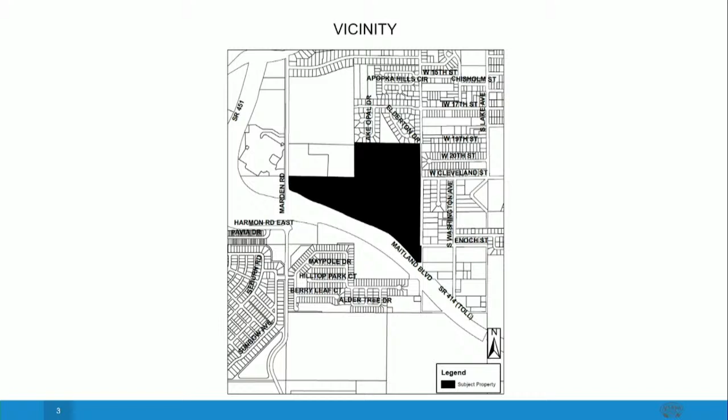The applicant is requesting a large-scale future land use amendment in order to develop Marden Road mixed-use development, a residential subdivision intended to consist of single-family residences, townhomes, and commercial. It has a zoning designation of residential multifamily, community commercial, and transitional; however, the applicant is requesting a change in zoning which will be forthcoming. Orange County Public Schools has provided a report that indicates capacity for the proposed development is not available at the elementary school level and is deficient by 4 seats. The property is zoned for Wheatley Elementary, Piedmont Lakes Middle, and Wekiva High. DRC recommends approval, staff recommends approval, and staff and the applicant are here to answer any questions you may have.

Any questions of staff? No, sir. Okay, thank you. Does the petitioner have a presentation? Seeing none, we'll close the presentations, open the public hearing. Anyone wish to appear before the commission on this item? Seeing none, we'll close the public hearing and bring it back to the commission. What's your pleasure?

Mr. Chairman, I find the proposed amendment consistent with the comprehensive plan and compatible with the character of the surrounding area, and recommend transmittal of the change in future land use from residential multifamily, commercial, and future land use in progress to mixed use, to the Florida Department of Economic Opportunity. We have a motion by Commissioner Washington, is there a second? Second, by Commissioner Stanley. We have a motion and a second. Any discussion? Hearing none, we'll vote. All in favor say aye. Aye. Any opposed say no. That carries unanimously.

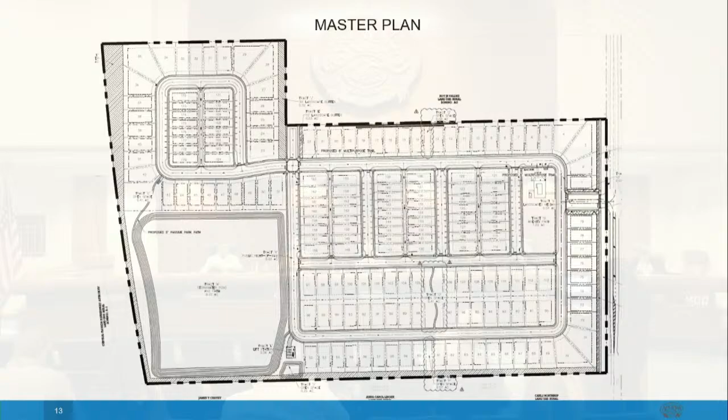There are no minimum or maximum living area standards and lot size requirements in the KPI form-based code. The applicant has submitted a major development plan detailing the construction of the proposed subdivision, which is currently under staff review. The DRC recommends approval of the rezoning, and the recommended motion is to recommend approval of the proposed change of zoning from Transitional to KPI MU, Kelly Park Interchange Mixed Use, with the assignment of the neighborhood overlay and recommend approval of the master plan.

Staff is available for questions. Okay, any questions of staff?

I have a question. How will anyone enter or exit the community? Right now, the access is on Plymouth Sorrento Road. Just one? Is that correct? Right here.

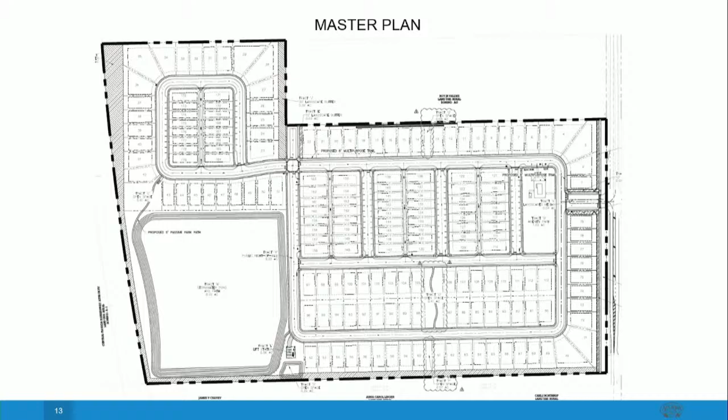And there is cross-access, as with other subdivision projects in the KPI. There's a planned cut access through here on the north. That'll actually go up to, the idea is that because of the interconnectivity designed into the Kelly Park Interchange form-based code, that'll be a spine road that'll go up to Publix. Publix right now, I think they're looking at mid-July for opening.

On the western side of the Publix lot, there's a roadway that's like the northern portion of the spine road for that side. So instead of people going out onto Plymouth Sorrento, the idea is they'll be able to go at this point and basically go north, right up to Publix, instead of going out onto a major thoroughfare.

Well, that's good to hear, because that spine road probably will have to navigate around existing businesses. There's really no business there. It's all, from here up to the north, basically farmland, residential, and larger plots. We've already got a couple of different developments looking to go in that area.

Well Jim, I have to tell you, I live there. I know there's a business there, it's a huge nursery. Nursery, agriculture, yes. Yeah, yeah, yeah.

So the spine road, is it going to go behind that? No, more than likely they'll probably sell out. They've got a few different locations, and they know they can sell that for quite a bit of money. I'm sure of that.

Okay, thank you. Further questions of staff? Yeah, Gene, is it normal to have one entrance for 900 single-family residents? That seems like a lot of homes for one entrance.

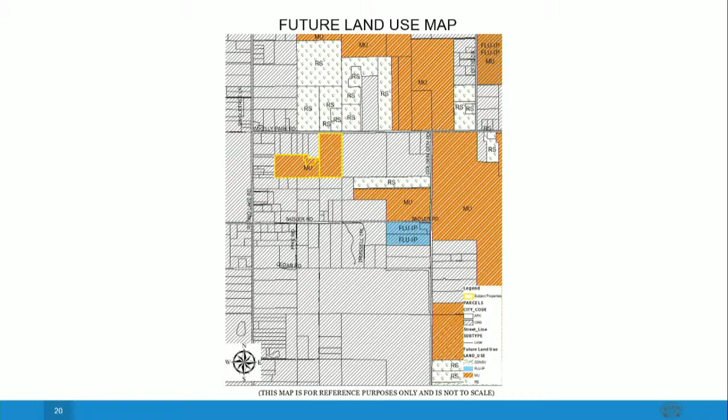The master plan shows 113 single-family lots with a minimum lot width of 55 feet, and the proposed minimum living area is 1,600 square feet. Access to the site is proposed off of West Kelly Park Road, with 4 vehicular and pedestrian future access points proposed, and in addition, 3 future pedestrian connection points are also proposed. The applicant has provided 9.48 acres of open space, where 7.73 acres are required. This open space includes a park, walking trails, and a playground.

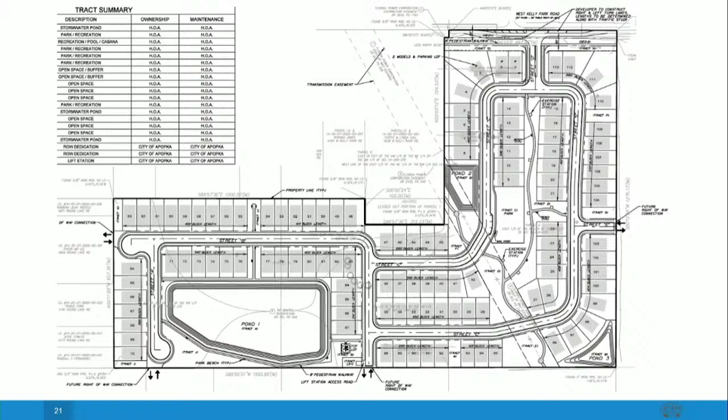The Development Review Committee recommends approval of the proposed rezoning and master plan, and the recommended motion for this evening is to find the proposed change of zoning and master plan consistent with the comprehensive plan and land development code and compatible with the character of the surrounding areas, recommending approval of the change of zoning from Agriculture District to KPI MU, Kelly Park Interchange Mixed Use District, and to assign the Neighborhood Overlay District, and to approve the master plan based on the findings and facts presented in the staff report and exhibits. This concludes my presentation, and the applicant and I would be happy to address any questions you may have.

Okay, any questions of staff? I gather the applicant doesn't have a presentation but is available for questions. Any questions of the applicant? Nope. Okay, then we'll close the presentations and open the public hearing. Anyone wish to appear before the commission on this item? Seeing none, we'll close the public hearing, bring it back to the commission.

What's your pleasure? I move that we find the proposed change of zoning and master plan consistent with the comprehensive plan and land development code and compatible with the character of the surrounding areas, recommending approval of the proposed change of zoning from AG Agriculture District to KPIMU Kelly Park Interchange Mixed Use District, and to assign the Neighborhood Overlay District, and to approve the master plan based on the findings and facts presented in the staff report and exhibits.

We have a motion by Commissioner Lorindo. Is there a second? I'll second. Second by Commissioner Norwood. We have a motion and a second. Is there any discussion? No, sir. Hearing none, we'll vote. All in favor say aye. Aye. Any opposed say no. That carries unanimously.

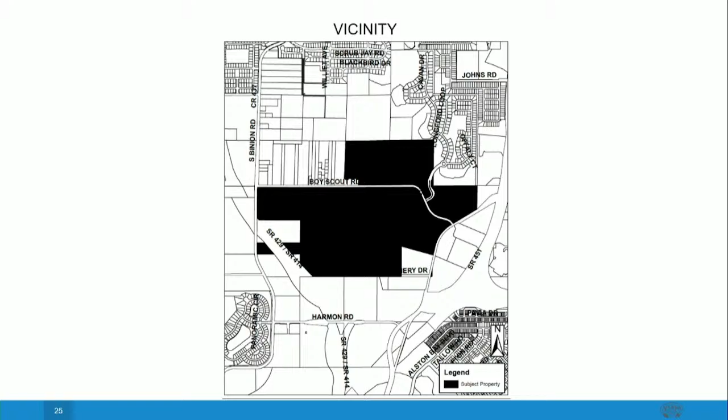The Ridge is a consolidation of 14 parcels totaling approximately 366 acres located north and south of Boy Scout Road, west of State Road 451, north of State Road 414, and west of State Road 429. The properties have current zoning designations of RSF 1A, CC, and mixed-use East Shore Gateway, and have a future land use designation of mixed use.

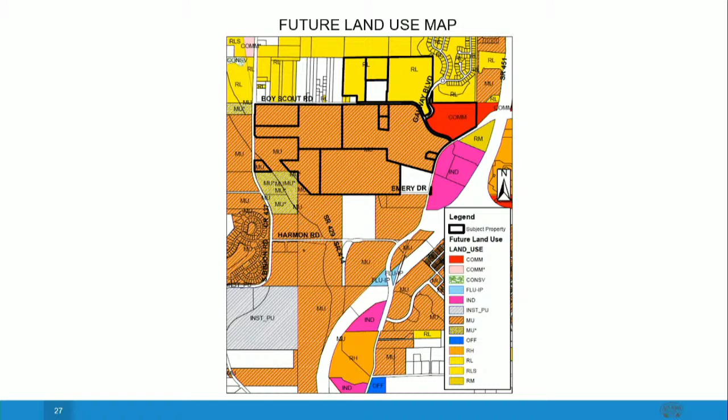The Ridge PD Master Plan proposes commercial on parcel 1 and portions of parcel 3, which is right here, as well as parcel 6 and 7, which are right here and right here. It comprises about 46.7 acres of the total area.

Based on the PD master plan, the applicant proposes the Spine Road Street A as a parallel facility right here to Boy Scout Road and leading to Binion Road via the proposed Street B. Street A right here, Street B right here, and Binion.

Parcel 1 is reserved for commercial uses and will be accessed via Galway Boulevard and Boy Scout Road, right here and right here. Parcel 2 is intended to include 340 units of single-family detached and townhome units on 79.2 acres. This is parcel 2 right here.

Parcel 3 is intended for 300 multifamily units on 16.2 acres, office uses on 10 acres, and commercial uses on 6.3 acres, which is right here.

Single-family residential detached units and townhomes are anticipated to be on parcel 4, which comprises 58.3 acres of the development, shown to have access points along Street A and B. This is parcel 4, Street A and B.

DRC recommends approval of the proposed rezoning and the accompanying master plan. The recommended motion is to recommend approval of the rezoning of the Ridge to PD and the PD master plan based on the findings and facts in the staff report and exhibits. Staff and applicant are available for questions.

In the meantime, the applicant also has a presentation. Okay, any questions of staff?

Well, maybe the applicant might cover it as well. This is a huge project, it's great. Yes. I go through there all the time to the golf course.

But anyway, you've got Breckenridge in there. Yes, sir. And not a few months ago, we approved another project from another developer on Boy Scout Road as well. I asked a question about who's to take responsibility to develop Boy Scout Road, to handle the traffic, and I didn't get an answer. So now, with all this going on, the question is still: who's going to take responsibility to build out Boy Scout Road? And also, with all this additional traffic, will there be any traffic control devices installed on Boy Scout Road? That's it.

Very good questions, and you deserve an answer. Boy Scout Road is not going to be widened because they're putting in a parallel facility. They are going to put in a signal at Boy Scout and Apopka Road.

And on the Binion side, even though it showed the roadway network a certain way, we're talking with the Central Florida Expressway about ramps to and from the north that would exit the toll road and tee into this project. So that would be a good thing.

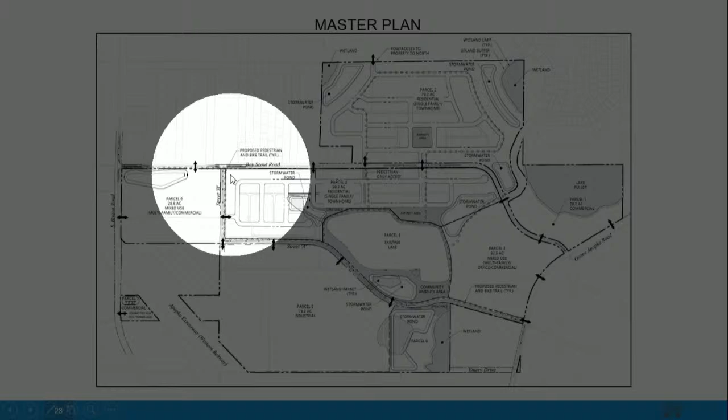So their roadway network, instead of the road doing this, it would come somewhere over here, and then this would come down. It's all conceptual right now, but we are working with Expressway, and we're thinking very hard about traffic in the area.

For Apopka Road, I'm working on an agreement right now with Orange County to widen the road. We're bringing a lot of impact fee money to the table, a lot of it generated by this project and the other ones that you all know about. All that money is going to go to Apopka Road.

The other thing this applicant is doing for us, it's sitting on my desk right now, we need to get started. They're going to study the Apopka corridor from Bradshaw Road down to Harmon Road, a pre-design kind of study so we know where we can widen, where we need turn lanes, where we need ponds. So transportation in this area has turned into a public-private partnership between the city, the county, this developer, others, and now Central Florida Expressway.

So I'm actually kind of excited, we're going to get something done. Those are both Orange County roads. They say they don't have any money, so we're bringing money to the table through impact fees, and hopefully they will fix all the stormwater issues, and then we'll take care of the road.

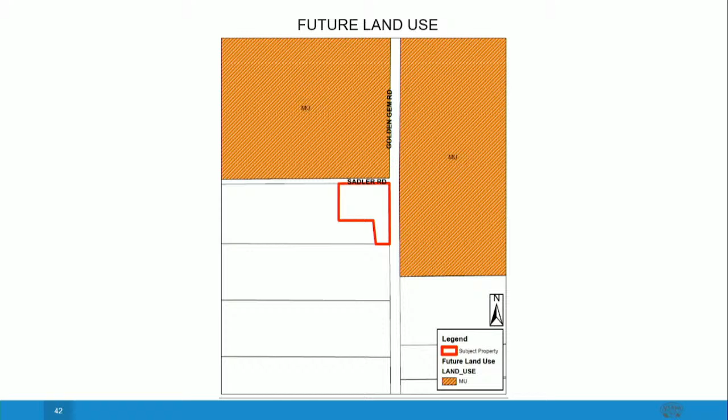It is also required to have a designation of mixed-use future land use before it is developed. DRC recommends approval. The recommended motion today is to recommend approval to amend the future land use map from county rural to mixed use. Staff and applicant are available for questions.

Okay, any questions of staff? I have a question. I've seen this before in documentation from staff, and I'm just curious about it. Policy 18.2: this future land use amendment does not include the corresponding proposed zoning category because the city has yet to adopt the development standards or form-based code consistent with this policy. I've seen that multiple times. Why haven't we developed zoning for this kind of future land use?

I couldn't hear quite a bit of what you were saying, but it has to do with karst features? No, Jim, it's policy 18.2, the second paragraph, first sentence. Is that in the report? It's in the package. Hold on a second.

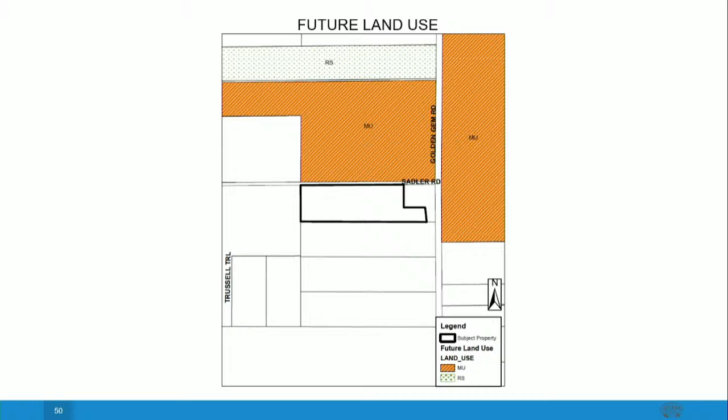DRC recommends approval, and the recommended motion tonight is to recommend approval to amend the future land use map from county rural to mixed use. Staff and applicant are again available for questions.

Any questions of staff? Any questions of the applicant? Okay, thank you. Then we'll close the presentations and open the public hearing. Anyone wish to appear before the commission on this item? Seeing none, we'll close the public hearing, bring it back to the commission.

What's your pleasure? Mr. Chairman, I would like to make a motion to find the future land use designation consistent with the comprehensive plan and the surrounding area and recommend approval for the future land use map designation from county rural to mixed use. We have a motion by Commissioner Norwood.

Is there a second? Second by Commissioner Lorendo. We have a motion and a second. Is there any discussion? Then we'll vote. All in favor say aye. Any opposed say no. And that carries unanimously.

Our next item is a change of zoning and approval of PD master plan for Marden Road, from residential multifamily RMF, community commercial CC, and transitional T, to Planned Development PD. Owner is Emerson Point Phase 2 LLC, care of Mary L. Dimitri. The applicant is MI Homes of Florida, care of Ricardo Diaz, and Appian Engineering, care of Luke M. Casson, P.E. Location is 1801 Marden Road, 1890 and 1900 South Hawthorne Avenue. We have a staff presentation.

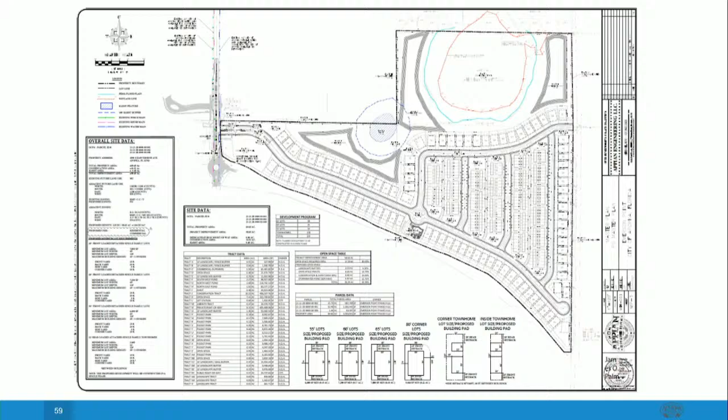A 6-foot tall wall will be provided between the commercial outparcel and lot 225 to act as a buffer between residential and commercial use. DRC recommends approval, staff recommends approval, and staff and the applicant are here to answer any questions you may have.

Any questions of staff? Any questions of the applicant?

Yes, if the applicant could come up and give us your name and address for the record, we have a question for you. Good evening, James Palm, Appian Engineering, 2221 Lee Road. Here to answer any questions.

This application will go before the city council for final approval, so whatever I say is just a comment. It says access to the site is proposed via full access located on Marden Road and Hawthorne Avenue. I'm familiar with those roads. Hawthorne Avenue is reminiscent of an issue the city had with a project built next to Rock Springs Ridge Road, where the developer wanted to connect to Rock Springs Ridge Road, and it didn't go well, so an alternate plan was developed. I'm just thinking about that project and Hawthorne Avenue, which is hardly developed. You know what I'm going to say - the neighborhood is not all that great. I'm just wondering, have you thought about that?

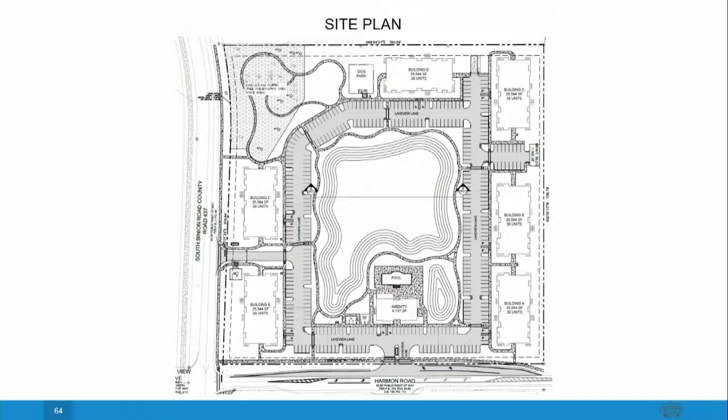Attached to the agenda packet are the architectural elevations submitted by the applicant, and the Development Review Committee recommends approval of the Binion Road multifamily major development plan. The recommended motion for this evening is to find the Binion Road multifamily major development plan consistent with the Land Development Code and the comprehensive plan, and recommend approval of the major development plan. This concludes my presentation, and the applicant and I would be happy to address any questions that you may have.

Yeah, Phil, I have a question for you. The main entrance to the project is off of Harmon Road. Is that correct? Is that directly across from the entrance road to the other project that's just about built, the Alta East Shore Apartments? South adjacent, yes sir, directly.

So is there going to be any kind of traffic control at that intersection? Where the entrance is to this project, if you go straight out, you're going to go right into the other project that's south, correct? So you're going to go across - they're putting in turn lanes on Harmon, which is all that's required. So someone could not drive directly from this project straight forward into the other project south? Do you follow my question? Maybe not.

Do you have the overall aerial that shows? They could do what you're saying, and it's possible that they will, because at some point there'll be commercial on the south side. But right now, the way the turn lanes are set up and the proximity to Binion Road, it doesn't need any more stop controls other than the side streets, which are the streets coming out of both apartment complexes, and the turn lanes. And the analysis that was conducted showed that it's going to be safe.